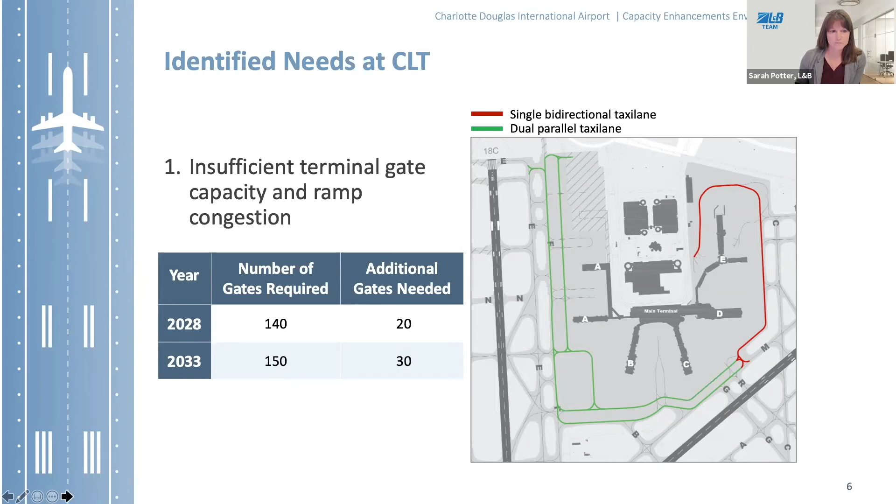The second need for the project is in addressing insufficient runway capacity to meet future demand at acceptable levels of delay. An acceptable level of delay for this project was defined as an all-weather average of 7 minutes per operation, and that's runway delay. 7 minutes of runway delay per operation. Airfield simulations were prepared so that we could understand the runway delays currently at Charlotte.

The simulations show that the throughput, which is the number of aircraft operations that can be processed by the runways, increases by 13% between 2016 and 2028, whereas all-weather average delays increased by 21%. These changes between throughput and delay demonstrate that the runway system has the ability to achieve greater throughput beyond the 2016 level, but it does so at rapidly increasing delays. So as a result, it's reasonable to conclude that the runway system at Charlotte was approaching capacity in 2016.

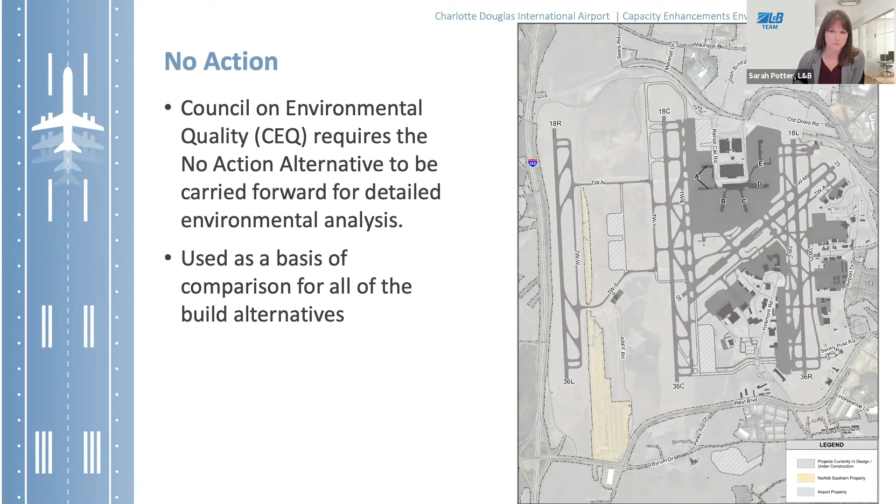In the no action alternative for this EA, all of the airport infrastructure would remain the same as today, except with a few additional independent improvement projects that are currently under design or construction. These projects are circled in orange on the slide, and they have each undergone their own independent NEPA documentation and approval process. These include the Concourse A Phase 2 Pier and Ramp Expansion, which is located just north of the second pier on A, and there's also additional ramp expansion to the north of that.

There's also the north end around taxiway on the center runway, which is on the north end. It also includes west hold pads. And then on the south midfield area, there's a de-ice pad and crossfield taxiway. In the no action scenario, it's very important to understand that even without the new runway and the terminal expansion, operations are forecasted to increase at the airport. And as a result, the airport would continue to experience delays and an increase in congestion on the airfield with the existing runway and shortage of gates.

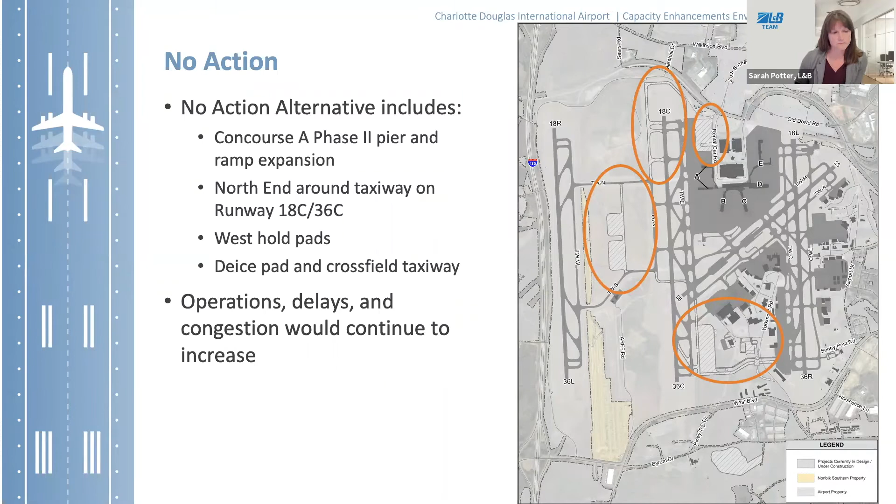So Alternative 1 is the first build alternative that we are carrying forward, and this one you have previously just seen, which is the proposed action. It includes a new runway in the midfield and the north and south end around taxiways. The new runway would be located 3,100 feet to the east of the west runway and 1,200 feet to the west of the center runway. This alternative also includes expansions of concourses B and C, crossfield taxiway corridors, and closing runway 5/23. And then it also includes the dual taxi lanes around the concourses.

The new runway is assumed to primarily be used by departures, and as a result, it's 10,000 feet long. Arrivals are assumed to occur on the west runway, the existing center runway, and the east runway. It is assumed that departures would occur on the new runway and also the east runway.

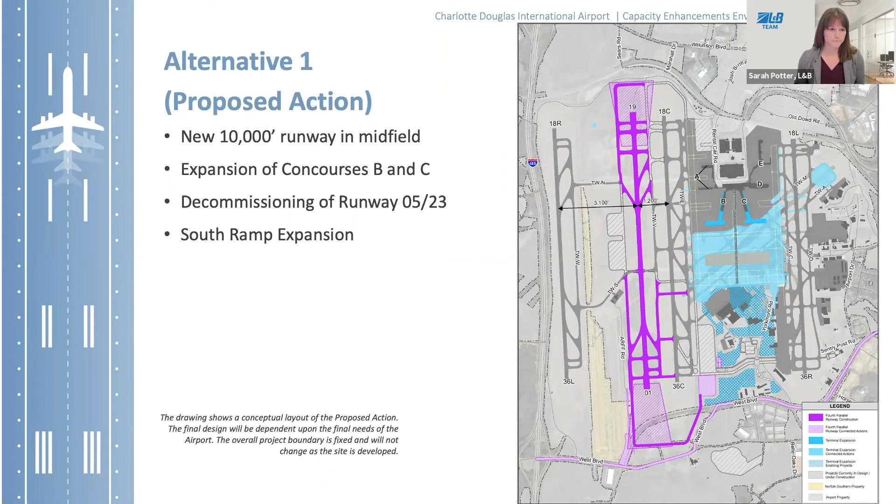Alternative 2 is very similar to Alternative 1. The new runway is located 3,200 feet to the east of the west runway and 1,100 feet west of the center runway. This 100-foot shift that you're seeing between Alternative 1 and Alternative 2 is meant to potentially take advantage of future runway separation rule changes by the FAA that allow the runways to be used differently.

In this alternative, the runway use is assumed to be exactly the same as Alternative 1, which is the new runway is 10,000 feet long and is a departure runway. So arrivals would occur on the west, center, and east runway, and departures are assumed to occur on the new runway and the east runway.

And then our last alternative, Alternative 3, includes a new runway in the midfield. This runway is located 3,400 feet to the east of the west runway and 900 feet to the west of the center runway. This new runway in this alternative is only 8,900 feet long, as it's assumed to be primarily used for arrivals, and therefore a 10,000-foot runway would not be required. So in this alternative, it's assumed arrivals would occur primarily on the west runway, the new runway, and then the east runway. And departures would occur on the existing center runway and the east runway.

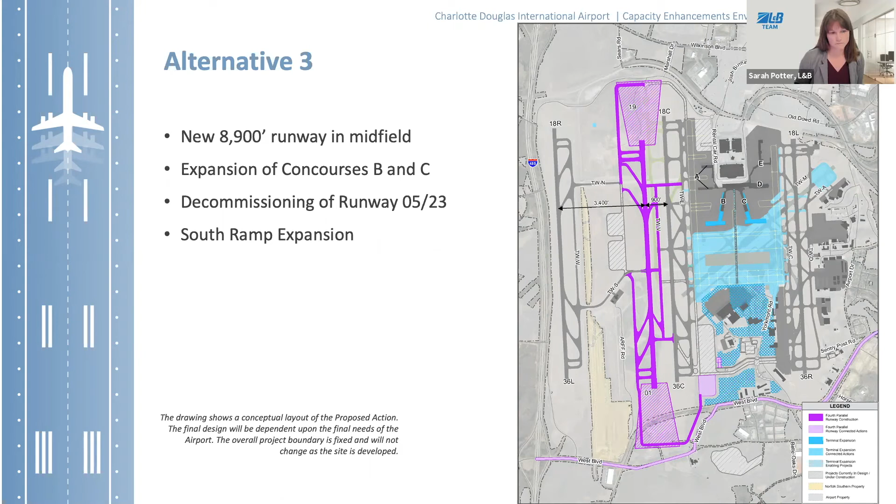Okay, so the first category we're going to discuss is historic, architectural, archaeological, and cultural resources. The National Historic Preservation Act is the primary law governing the preservation of historic and prehistoric resources. Section 106 of that act requires the FAA to determine the potential effects of undertakings, or what we call a proposed action or an alternative.

The study area defined for historic resources is called the Area of Potential Effect, or APE, and is shown on the screen in purple. This boundary was identified to include all areas that could physically be impacted by the project, but it also includes areas where visual or noise increases could occur.

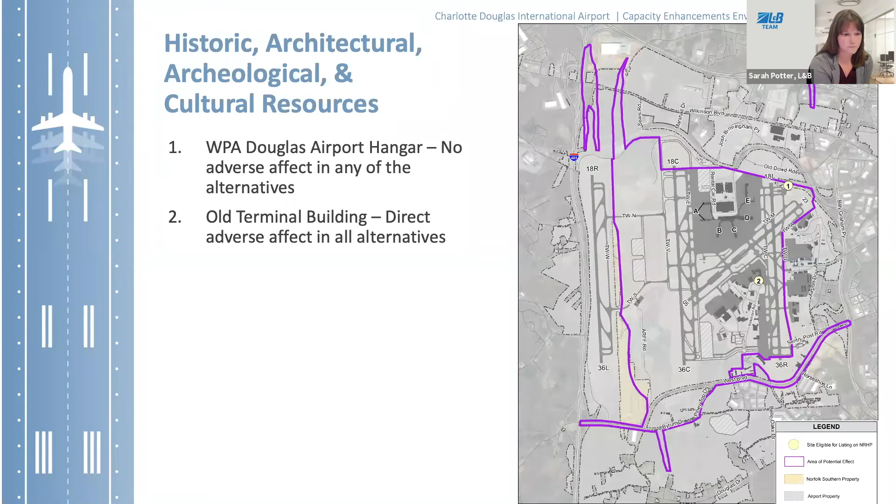All right, moving on to the U.S. Department of Transportation Section 4(f). These are resources which are publicly protected, and they include publicly owned parks, recreation areas, wildlife and waterfowl refuges, and historic sites of national, local, or state significance. For Section 4(f) resources in this EA, the study area was the same as historic resources, as historic resources are also Section 4(f) resources. So the two previously discussed, the WPA Douglas Airport hangar and the old terminal building, are both considered 4(f) and are located within our study area.

And now when you look at 4(f) impacts, there's two types that you have to look at within NEPA. The first is a physical use, and the second is what we call a constructive use. A physical use would occur when the action involves an actual physical taking of the property. And then a constructive use is when the impacts on the property are so severe that the activities or features that qualify the property for protection are impaired.

So implementation of all of the alternatives was determined to have a physical use on the old terminal building. As I just mentioned, it would be physically removed as part of the project. The WPA Douglas Airport hangar was not going to experience a physical or constructive use. And as previously mentioned, to mitigate the impact of the old terminal, an MOA will be prepared between the FAA, North Carolina SHPO, and the City of Charlotte.

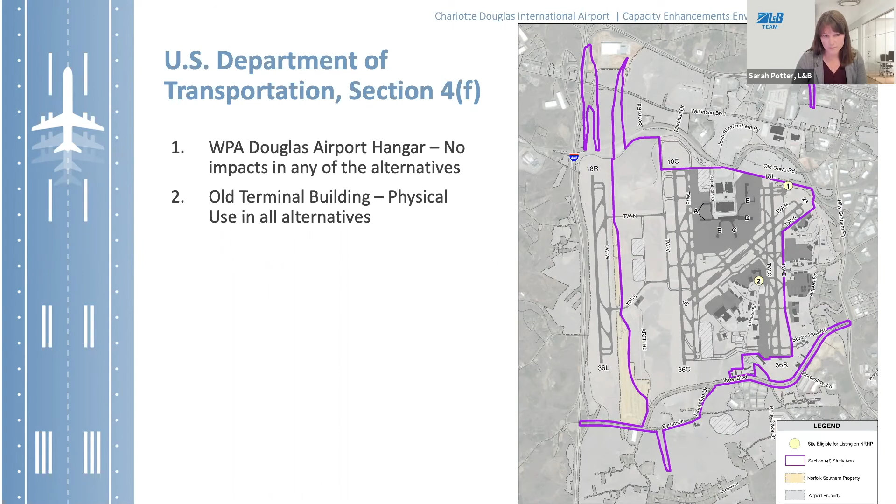And one last point I want to make before we talk about each alternative is that the FAA requires that we use a noise model for the determination of impacts. Actual measurements are not allowed to be used. We have to use an actual model, and we have to develop these impacts through the use of contours.

Can you go back a slide, please, Kevin? Alternate one, thank you. One more forward, sorry. There you go, thank you.

There would be 21 fewer residential units located within the alternative 1 65 DNL noise contour. There would also be one less school. There would be one more church and one more daycare facility located in the 65 DNL for the alternative 1 noise contour.

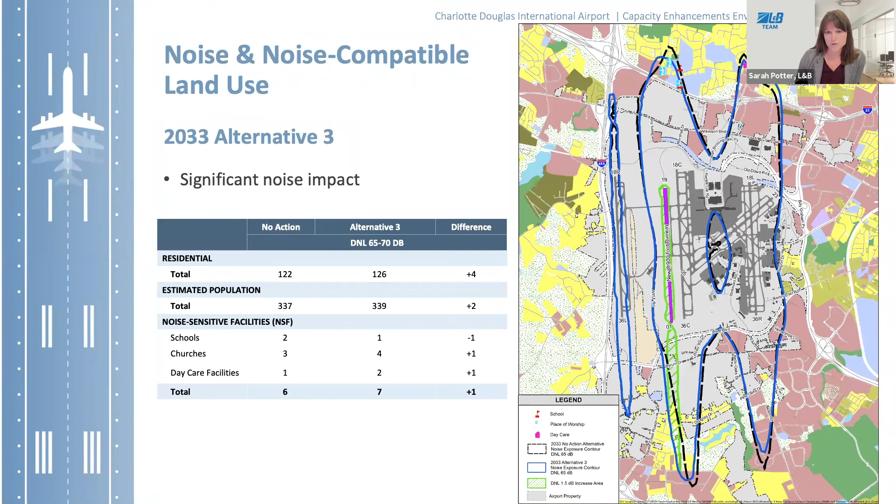So this next slide is just a zoom in of that southern area where the 1.5 dB extends south. There would be 20 housing units located within that significant impact area, approximately 50 people. Out of the 20 residential units, 16 have been previously sound insulated, and 4 have been offered, however, have declined.

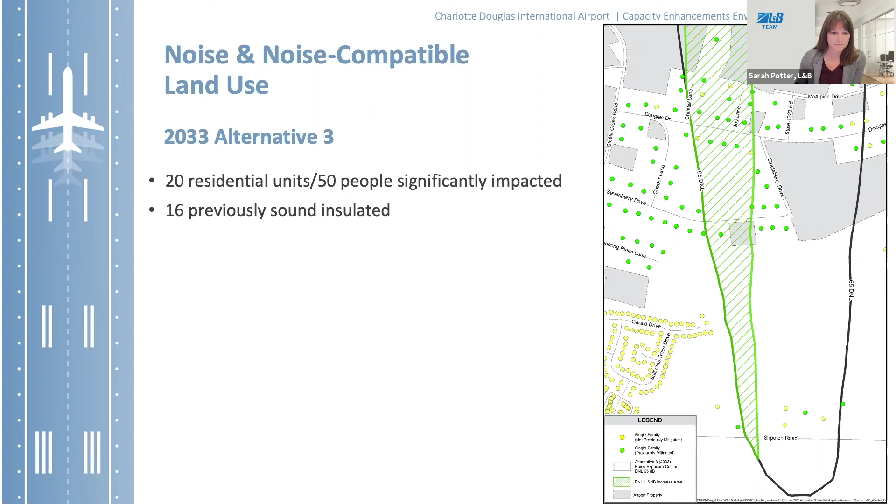All right, so the last category we're going to discuss is water resources. And as I mentioned, this includes wetlands, floodplains, surface waters, and groundwater resources. It also includes wild and scenic rivers, however, there are none in the area. So the study area for this resource was defined by the area that would have physical impacts from the project. And you can see it identified in the orange outline on this slide.

The construction of all 3 alternatives would result in permanent impact to approximately 5 acres of wetlands and 8,150 linear feet of streams, and those impacts would require an individual permit from the Army Corps of Engineers, and mitigation is required. It's assumed the mitigation would be achieved through the purchase of stream and wetland credits from the Charlotte-Mecklenburg Stormwater Services Umbrella Stream and Wetland Mitigation Bank.

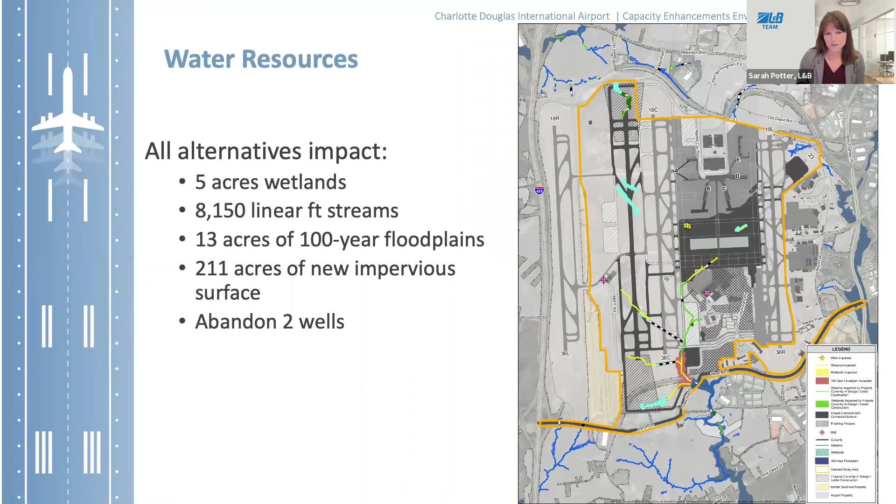There would be 13 acres of 100-year floodplains impacted on the south end of the airport property, and this would require coordination with FEMA and remapping of the floodplains. There also would be an addition of 211 acres of new impervious surface, which is new pavement, and this would be accommodated by the airport's existing stormwater system and would not result in impacts. And then lastly, there are 2 wells located south of Concourse B that would need to be abandoned, and that would be done in accordance with federal, state, and local regulations.

So to summarize each of the alternatives, alternatives 1 and 2 would not have significant impacts. Alternative 3 would result in significant noise impacts. And just as a reminder, alternative 1 is the airport's proposed project at this time.

Okay, so moving on to COVID, we just don't want to ignore the fact that COVID exists and has happened. And we know that the effects of COVID on the aviation industry are still happening at this time. Despite that, after every other major worldwide incident, the aviation industry has recovered, and there is an underlying demand for air transportation. Across the country, it's unknown how long it'll take to get back to pre-pandemic levels.

But Charlotte is seeing a very rapid increase and is, as far as I know, back at 2019 levels as we speak today. So they have been one of the faster recovering airports in the country to get back to pre-pandemic levels. So Charlotte will continue to monitor the actual traffic and delays and make sure that they're tracking the timeframes that we have outlined in this EA and that these are still appropriate for this project.